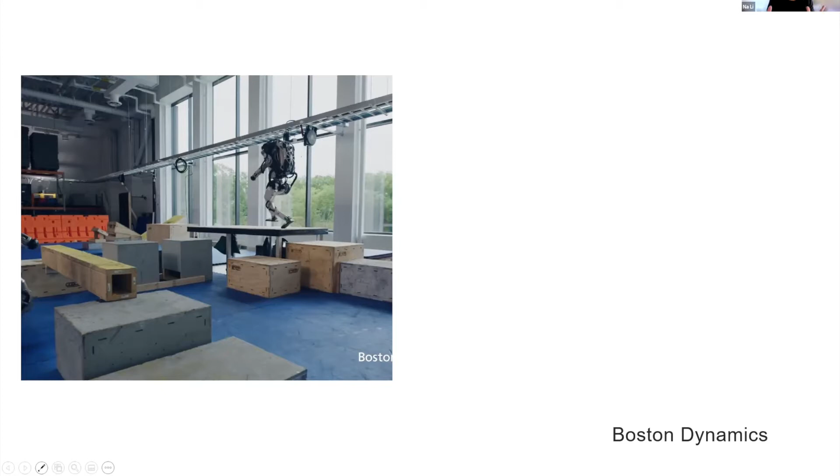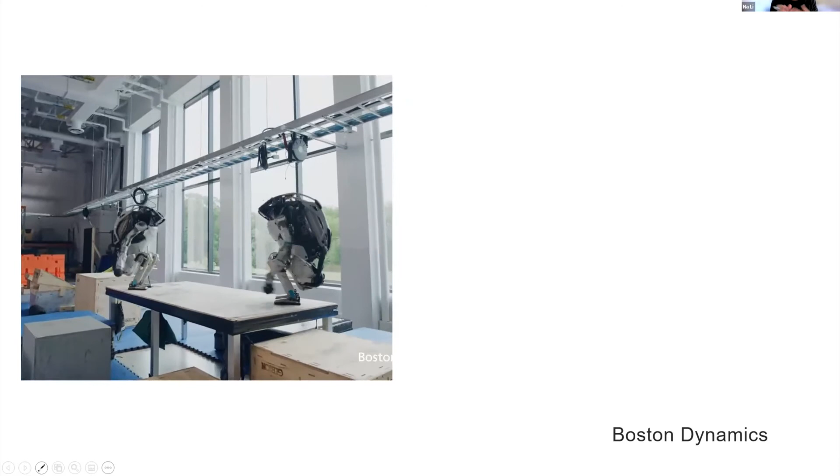Then we look at the progress. Indeed, there have been many exciting news. I think every year Boston Dynamics posts one cool video about how their robots have performed very difficult tasks. This is about Atlas, right? Every time I watch the video about Atlas, I imagine, how am I able to do this? I don't think even if people trained me hard, I'd be able to do any backflip.

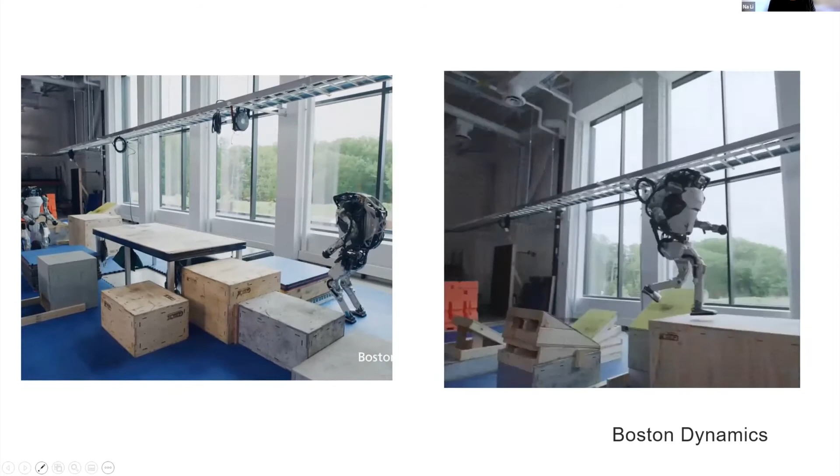But at the same time, if we just go ahead and Google it, we will also find the failure videos. So it's hard to imagine how many experiments they've been doing in order to collect enough data, or are they really using this kind of deep learning? At least right now, from the outsider's view, it's hard to know how they're really making this set of videos.

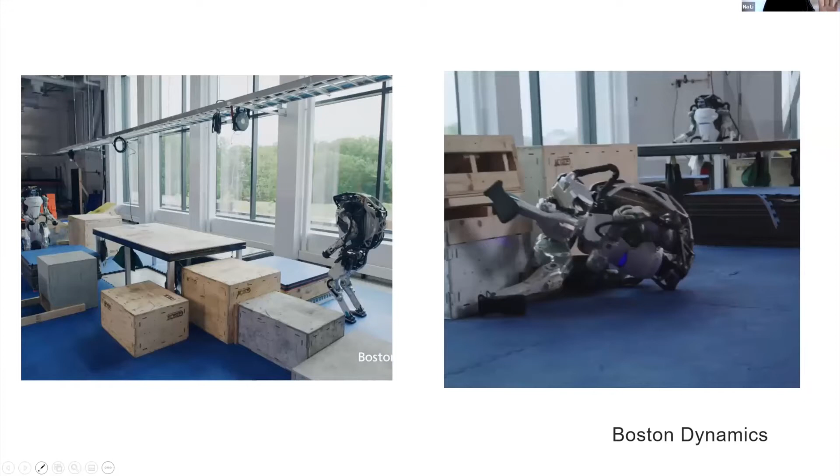So this is about the robotics that probably in the future. Now when we look at the societal system, that's actually closer to our daily life, the situation is actually even more cruel.

Even early last year, there was a big unexpected winter storm in Texas. To cope with the winter storm, ERCOT had to perform rolling blackouts. Millions of people's lives got affected, and there were 246 deaths reported related to this winter storm. So you can see, even with those kinds of smart devices, when there's a big urgency like a winter storm, we kind of go back to some old solutions.

Now speaking of autonomous driving, even though everyone is so excited about mixed autonomy, when we go watch those YouTube videos, it's devastating to see the tragedy of car crashes. So the message is that learning for physical, societal, dynamical systems is very challenging. It's different from just learning data from image data or from language data.

To address those challenges, there has been a growing need to integrate machine learning and dynamic control. I would say in the past years, the learning and control communities have been working together for a long time.

Now we look at the current trend. This is my biased viewpoint from a theoretical point of view. What's the difference between the two research areas? Speaking of learning, it's powerful in image recognition and language processing.

From the theory side, a lot of people, when they develop a learning method, the question they ask is: can I improve the query speed? Can I improve the sample complexity? If I'm doing online learning, can I make sure the regret is not big? And for image recognition, I really care about generalization, the statistical guarantee.

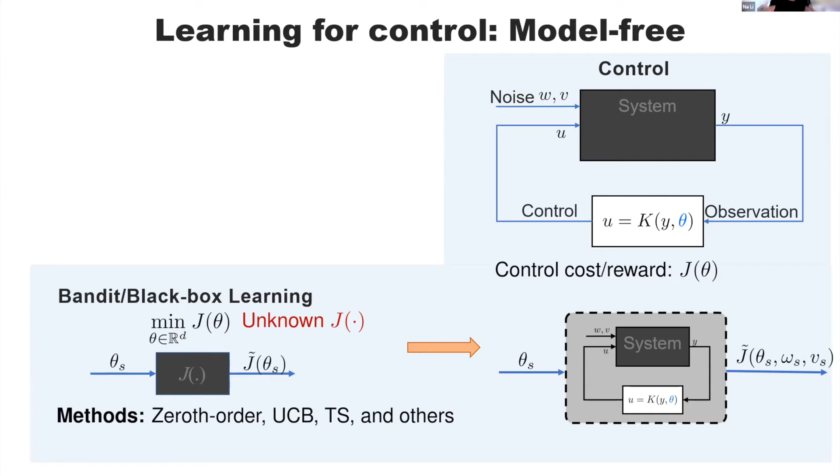I want to highlight this: there's lots of uncertainty and stochastics happening in the system. Every time I try to evaluate the performance of theta, it's always going to be affected by external disturbances or some noises. That's why I put in J tilde, not really J. It's impossible to have the true J using a limited number of data or channels.

So now the challenge for this one: this looks like I can go ahead to test the algorithm, but what is the performance, stability, probability, convergence? How many times do you really need to run those simulations? Another big challenge is it kind of totally throws away my prior knowledge. But what if I have some knowledge of my system? How do I incorporate this prior knowledge?

Those are the challenges of these problems. I'm not going to give you an answer for those, but I'm going to show you some progress we've been doing in our group. This is about learning for control.

Another thing I want to highlight: even though I say this is learning for control, from another perspective, you can also view those model-based and model-free control methods as control for learning. What do I mean by that?

If I really want to make my learning useful for the physical system, I have to deal with these dynamical system questions. In order to make the learning useful, I'm going to redesign the good learning-based control. You can also view learning for control as control for learning, like how to make learning be useful.

But there's another direct way of control for learning, so that's what I'm going to talk about today. Now let's come back to those learning methods.

There are different types of learning methods. For these two examples, like supervised learning, people using stochastic gradient descent, it's borrowed. And for the bandit or black box learning, again, there's a different type of method. But no matter what type of method, all the methods are iterative methods.

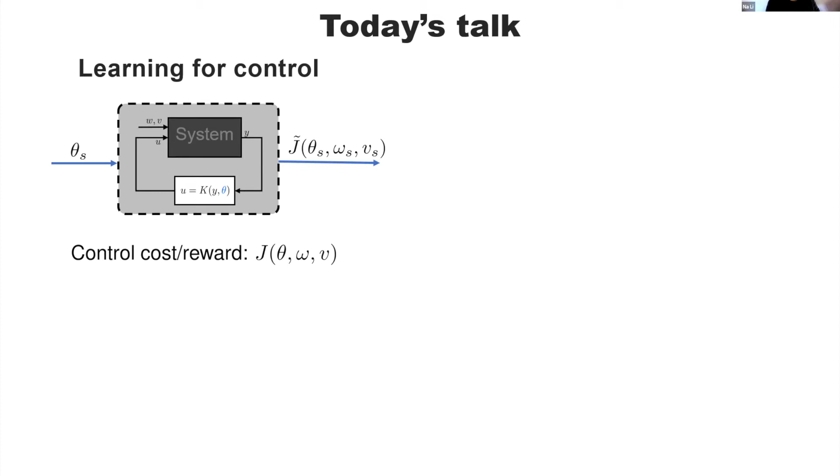So today's talk, I'm not going to answer all the questions I raised, but all the questions were meaningful questions to do a PhD thesis. And like the talk, I'm going to focus on two perspectives.

For the learning for control, I'm going to focus on the model-free part, where I'm not going to really model specifically about the system. So I treat it as a black box, taking the controller, looking at the outcome, and I want to see how this method is going to perform. Can I really guarantee certain stability, robustness, some question about this?

And on the other hand, come back to control for learning. If I really view this as a dynamical system, what is it that I can do? Can I help it? I can even show the limitation for the original method. So let me dive into the details.

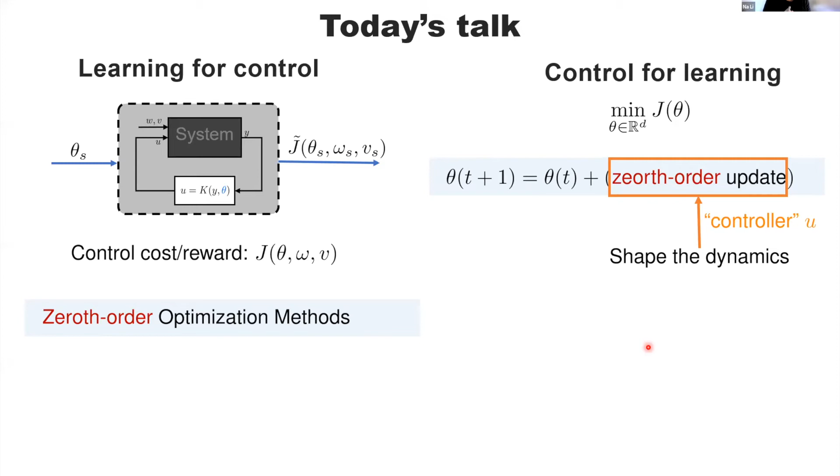Before the talk, the one common thing for these two parts is we're going to study the zeroth order method. So what really is the zeroth order method? For the zeroth order optimization, it's one of the black box optimization methods. Here we do not know J, but one assumption we're making is that J is differentiable, so the gradient is well defined, just there's no way to evaluate the gradient.

So we do the black box feedback, taking theta, getting the J theta feedback, for the gradient estimator. Zeroth order optimization roughly follows this line: taking theta and then doing the gradient estimator based on the value J.

You can imagine one easy way to do it is the finite difference approximation. The 2-point gradient estimator is kind of the finite difference approximation, just using less data points. At each time, rather than getting the direction along each of the D dimensions, you just take a random direction, do a small perturbation, and then do the finite difference approximation.

So look here, if the gap is R, over by R, this is kind of the gradient definition, once you make R go to 0. So this is a 2-point gradient estimator, which is actually quite powerful. When people compare the 2-point gradient estimator with the true gradient, the performance gap is quite small.

But for the rest of the talk, I'm going to focus on a different thing, the single-point gradient estimator. What's the reason behind it? What's a single-point gradient estimator? Rather than doing the finite difference approximation, it just uses 1 point of the value function, and this one can serve as a gradient estimation.

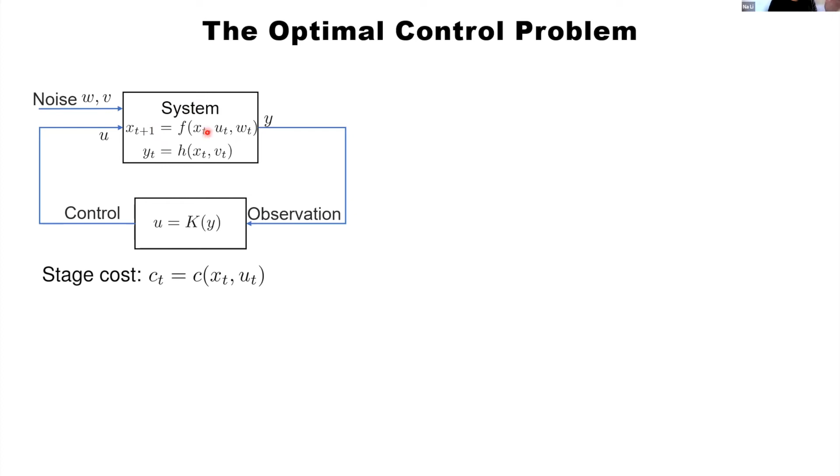As I mentioned, we can treat the control problem as a black box optimization problem. Let me put in a little more detail. We only focus on optimal control problems here, not other control problems. What does optimal control problem mean? I have a dynamical system, observation, state, controller. First, there's a stage cost well defined at each stage t, where t is the time associated with the time evolution of the system.

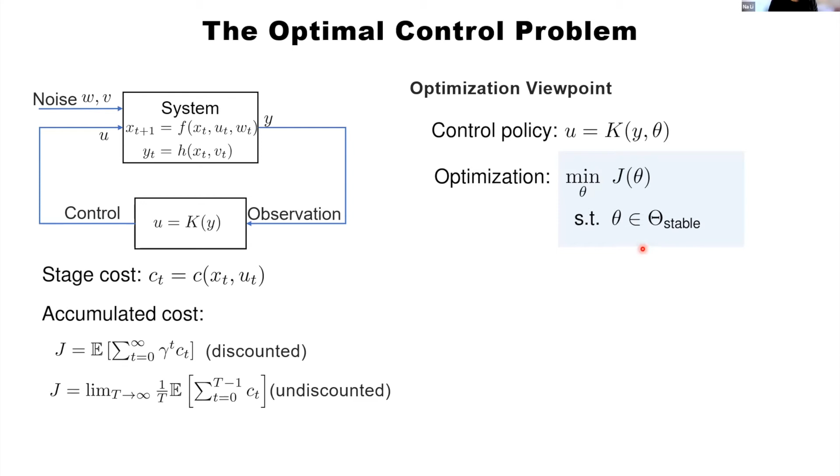Once we put in the controller, if I just care about stage cost, that's not really enough - I really care about the accumulated cost. You can do finite time horizon or infinite time horizon. We're going to focus on infinite time horizon. For the two cases of infinite time horizon, you can do discounted or undiscounted. Once we have this cost, we can view this as an optimization problem. I parameterize my policy by some parameter theta, and then treat this as an optimization problem. But one condition for this control problem is making sure my theta at least guarantees my system is stable before we talk about optimality.

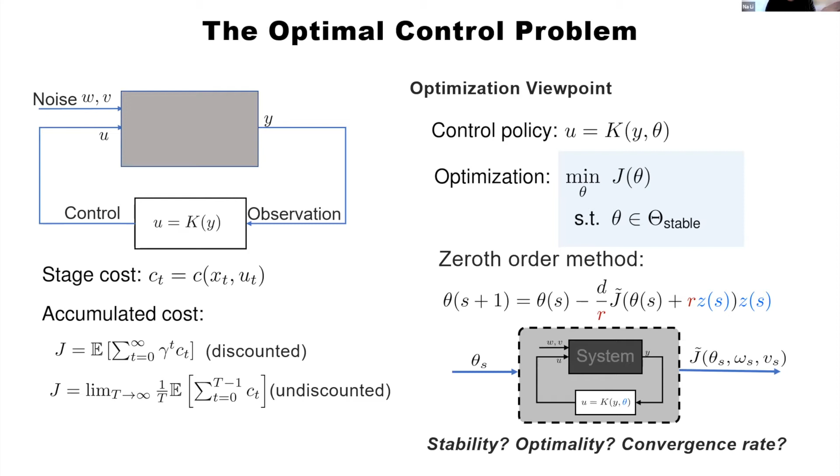So we're going to use the zeroth order method - taking theta, getting some realization, and taking the update to see how it works. This update is the single point zeroth order estimation. So this is the high level view. With this kind of view, there's a question - I'll talk about stability, optimality, and convergence rate. There's exciting positive news. I guess some of you already know this paper, it's from 2018 by Maryam Fazel's group.

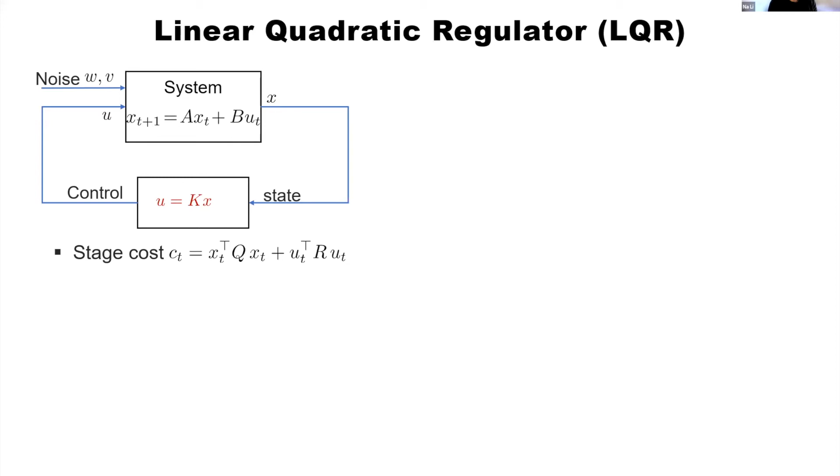So look at this problem - my first question is, can this method even work for the standard textbook question, which is LQR, linear quadratic regulator? In this problem, my dynamics is linear, and I have full observation of the state. I have a stage cost which is quadratic - that looks nice, because with this quadratic problem I know the optimal controller is a linear controller. So I just need the parameterization of K - I don't need a fancy deep neural net to parameterize the controller policy. And once I have that, if I have the model, I can even write down exactly what my J(K) is. So then I have a good understanding of the geometry of J(K), which helps me analyze the convergence of the learning method.

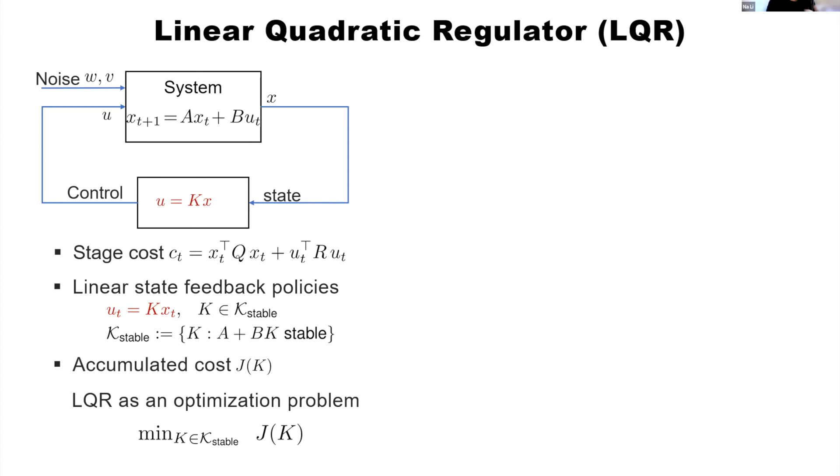So we treat this problem as an optimization problem. As I mentioned, once this 2018 paper came out, it generated a lot of excitement from both communities - hey, now it looks like the learning method can really help in the control design for this LQR problem. What do I mean? We can do the 2-point or single point estimator, and especially if I do single point under uncertainty.

So by choosing R carefully, and also eta - excuse me, there's a typo here - and also the step size carefully, we can guarantee with high probability that the learning process is going to be stable. Each K is going to stabilize the system, as long as I start with a good controller K which stabilizes the system. And then it's able to find the global optimal. So what's the reason this is even doable? As I mentioned, it's because this optimization method relates to the optimization landscape.

Even though the stable region is non-convex, it's connected. An additional nice property is the cost function JK here. Even though it's non-convex, it has this kind of nice property like gradient domination, which is an analogy of strongly convex in the non-convex domain. So I can guarantee there's a unique stationary point, and this stationary point is the optimal point. Because it's got this nice property, everything works.

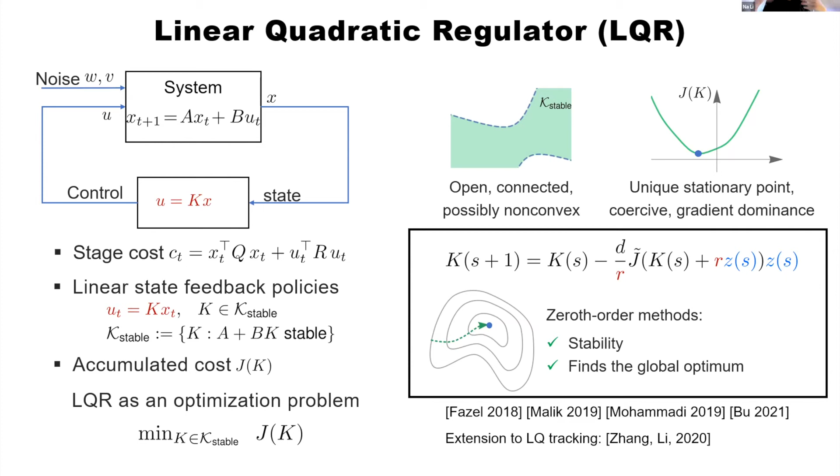Now let's dive into the problem I really want to talk about: decentralized LQR. This is motivated by the societal network systems I mentioned before. Assume I'm using a linear system to approximate the underlying physical dynamics, and I have sensors and actuators at different locations. You can call those agents or devices, and each one observes some information of the system, but no one is able to really observe the full information immediately. It's only a partial observation. Each controller takes in its own local controller to perturb the system.

But this is the local controller, so we focus on a control policy that reacts to the local information observed. Once I put in this domain, each agent has a cost, and everyone can observe how well the system is performing at their local location. If you think about thermal control in a complex building, for each room you roughly know how good the temperature is, how much power you're really consuming. This corresponds to those local costs, everyone observing how well the system is performing locally.

The objective is to find a good controller for every agent, for every device, to minimize the global cost, the cost I care about for the entire system. For transportation, I care about the congestion over the entire network. For building thermal control, I care about how well the temperature is across the entire building rather than just one room.

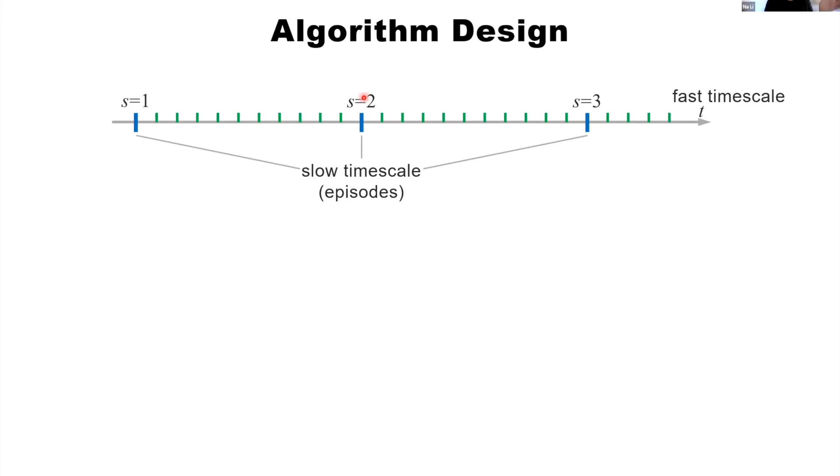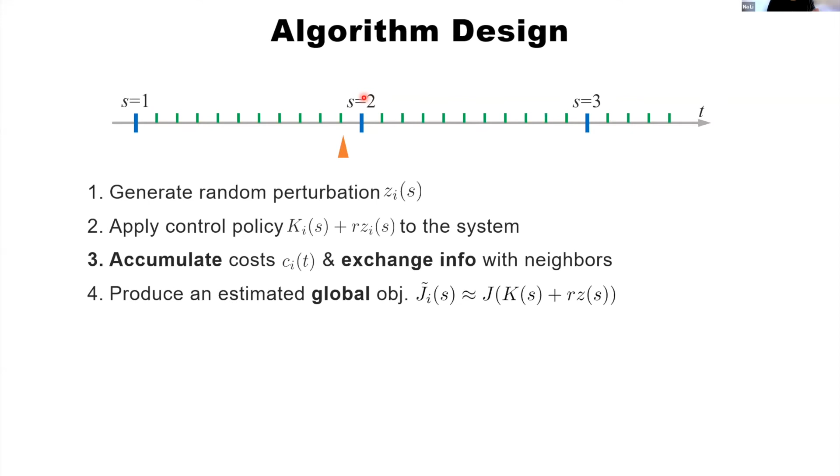Each slow step we call an episode 1, episode 2, and so on. So how does the algorithm perform? First, it's just an outline. We generate a random perturbation, I'll tell you how we generate that random perturbation later. Everyone applies the local control policy, they observe their own cost, and they share information.

By sharing the information, they get to estimate the global objective cost. Once they have some global estimation, everyone has their own local estimation of the global objective. They perform their zeroth order partial gradient estimator, and everything else just follows the zeroth order method, and then repeat the process. So let's dive in.

How exactly can they really estimate the global cost? The nice thing here is that the global cost is just the summation of everyone's cost. For this problem, the averaging or consensus method can do a very good job. Each time, every agent has their own estimation, their own observation that they share with their neighbors, and they add the new observation they're going to have. With a certain communication weight matrix being chosen, the process is able to find the true global cost function.

So what's the performance guarantee? For all these kinds of consensus papers, you can grab any one of them to see what the performance guarantee can be. It also shows, if we really run the system for T_J, how accurate it is.

I want to highlight one thing. This is a little bit roughly different from the distributed optimization side, in my opinion. Even without a decentralized method, in the centralized method I mentioned, I need to run my simulator, put in my controller, wait, and then update. So for my system, even for a single agent, I need to wait anyway. For this problem, my multi-agent setup didn't really complicate my process much.

You are waiting to understand your limit average cost. At the same time, you also exchange information. So we do not need to add another loop. All this sharing of information and estimating the global accumulated cost happens at the same time, which is pretty nice. That's why we didn't push in, hey, if I really do the consensus optimization, I will put in communication later on. This is a natural way, I don't need to do that. It's just using the same inner loop process to also put in my estimation of the global cost.

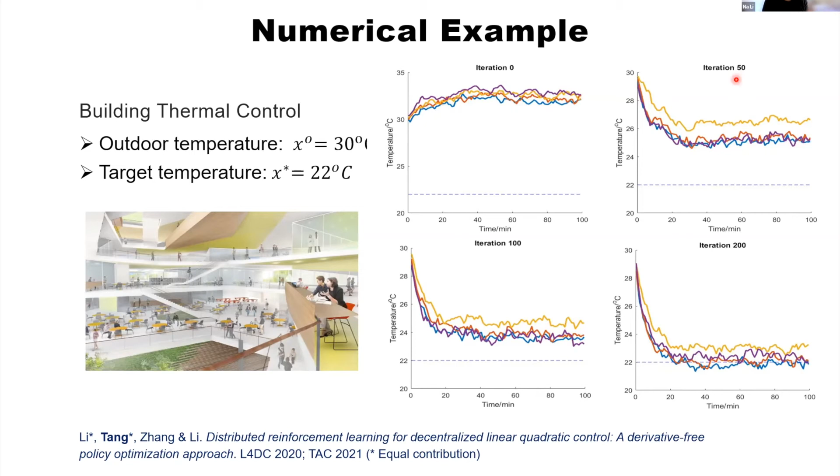And if you look at the simulation here, roughly by 100 iterations the controller is already making the system go in the right direction. The iteration corresponds to the episode we talked about before. It's actually faster than what our theory expected, but that's typically the case - the theoretical guarantee is always more conservative.

But now let me come back to a more critical issue. So for stability, yeah, we have a high probability guarantee - there's no additional definition of stability needed. But the optimality guarantee - this is kind of cheating here - when we say optimality guarantee, the truth is we only have the stationarity guarantee.

It's like, with how many samples will my gradient get small. So the question is, does this stationary point really correspond to the optimal point? No, right? This is a weak optimality guarantee. So why do we only have this one?

That's something I want to talk about now - the importance of the geometry of this control problem. So let's come back and compare with the successful story we had before for the centralized LQR. For the centralized LQR, we observe all the information X, and we know this is the optimal controller.

And the decentralized LQR, this is not really the optimal controller if we open up all the choice of classes of the controller. So we stick to this parameterization. It's Ki times my local observation. So I stick with that because my information is limited.

And what's the reason of it? Now we look at the region. So for this region, even non-convex, but it's connected. It's just one connected component. So if I start with some point, at least I have a hope to converge to the optimal point.

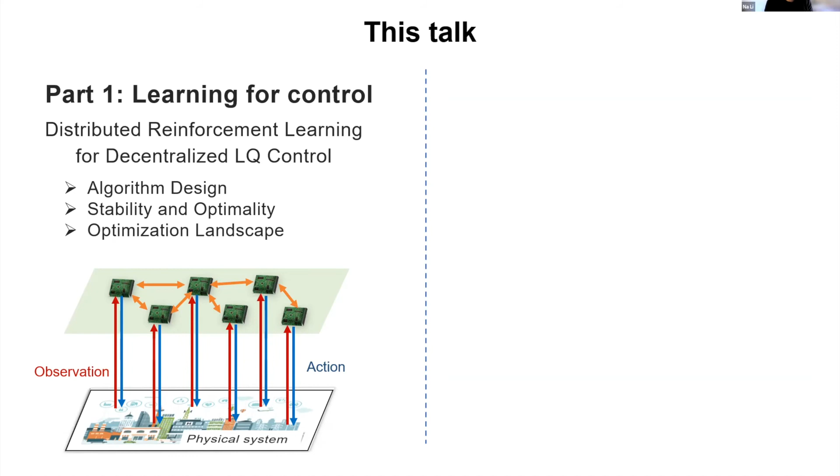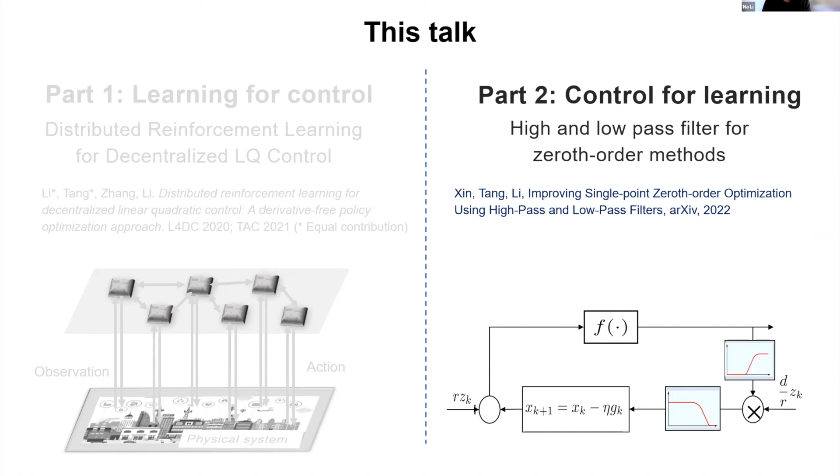Then I will continue to talk about the second part, control for learning, which is a little bit different flavor compared to this work. But the motivation again comes back to wanting to improve our methods so we can do better control. So let's come back to this performance guarantee.

I mentioned one thing here - the sample complexity we put in. And we were trying to ask a question: if we do sample-based methods through zeroth order optimization, is this the optimal thing we can do? Can we remove that complexity, not really 1 over epsilon to the 4th, and do something better? So that's something we ask ourselves - can we do better sample complexity?

I think a lot of you will have the question: hey, you're just doing the zeroth order method I was showing, which is just vanilla gradient descent. How about doing the accelerated gradient descent? So yes, we're going to accelerate the zeroth order optimization, but I'm not going to talk about Nesterov. I'll have one slide for Nesterov to say the problem with using Nesterov for this type of problem. So we're going to accelerate zeroth order optimization, but how are we going to do it?

We're actually going to come back to the traditional control and electrical engineering perspective. Let me take a detour to tell you a similar story. Zeroth order optimization - I think a lot of discrete time, learning and optimization people have been working on it. But in the control field, we have something similar, almost exactly the same, which took me a while to eventually recognize - it's called extremum seeking control.

This is called extremum seeking control, similar to the zeroth order method. It's quite powerful and very similar. Rather than thinking about discrete time, this is a continuous time dynamics.

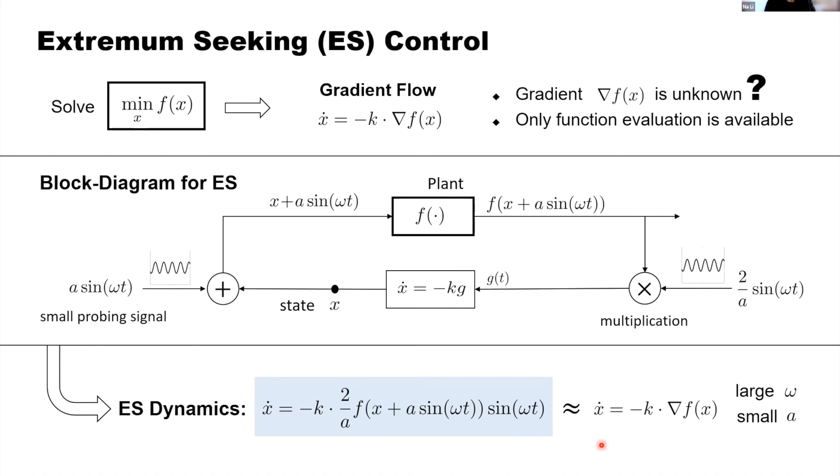For this one, how people analyze it is to do the averaging. Roughly this method will approximate the gradient flow in continuous time.

To show a little more intuition or visualization of what exactly the method has been doing - the frequency, typically you put in a very large frequency to perturb, and your amplitude A is going to be small, since you don't want to corrupt your original signal. So this is the trajectory of X you will see. It has a time scale separation.

For the fast time scale, this is the fast variation due to those perturbations. And then this is the slow variation that actually describes overall how X is evolving, which is the gradient flow, the true gradient flow.

How people analyze it - we make an assumption that the function is differentiable. Here I'm using the Taylor expansion to explain it. From the Taylor expansion, that's how it looks: f(x) plus this perturbation term.

From the control and dynamical systems area, how people analyze it is to do averaging. I average the dynamics over a time period, especially if you put it into the period of the sinusoidal signal, then this part will kind of cancel once you do the integration. You only get one term for this part, and this is a small error term.

From extremum seeking control, it looks similar to the zeroth order method - the method, the analysis method is definitely different. But let me compare why I say it looks identical to me. The only difference - now you can compare together. Continuous time versus discrete time - not really a big difference in this one.

Now the perturbation - this is a deterministic signal, sinusoid, versus this is a random signal. And magnitude - I still need to control how much I'm going to perturb. The R and the control gain is like how aggressive my controller, my system dynamics, react to the signal. And the step size - you can find all those analogies, a one-by-one correspondence between the two methods.

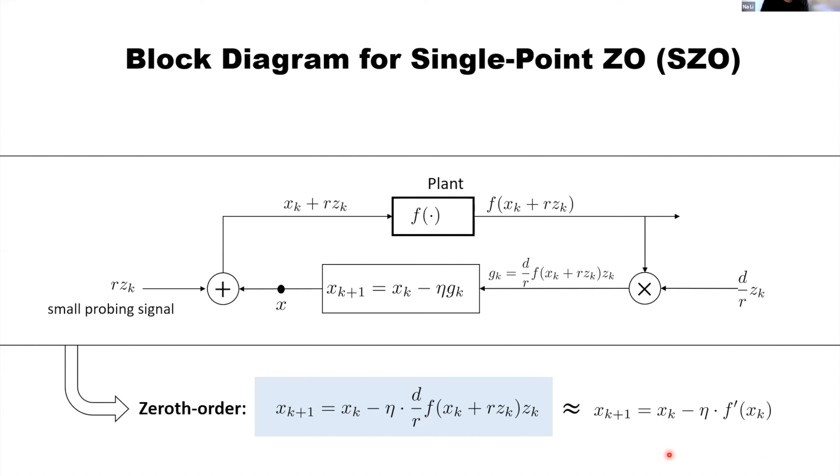Now come back to extremum seeking control. When we look at the extremum seeking control textbook, we found that because people actually use extremum seeking control in practical physical systems, people observed, okay, something we don't like, we want to improve it. So how do people improve it? Here, I'm going to show people actually add filters into it.

So what is the filter? Here we had a high pass filter and a low pass filter. For the low pass filter, when I first saw it, I thought it makes sense, right? With too many noise and fluctuation going on, I want to add in some low pass filter to get in the true gradient information. That's kind of my hello intuition. But then, like, the high pass filter—there's already too much noise, too much fluctuation. Why would you actually need the high pass filter here?

So now, why do people need it? For the high pass filter, it's actually going to wash out some DC component, which is not useful for my gradient estimation. I'll show you even more math later on to tell you why the high pass filter is actually a very good thing here.

And the low pass filter indeed washes out some high frequencies to get a better gradient estimation. In the control textbook, distributed control textbook, you can find that the high pass filter and low pass filter improve the transient behavior. So you'll have less oscillation, much smoother transient behavior before you really converge to that optimal point. And you can imagine, I bring the block diagram.

Now since I have the block diagram, before that, let me give a little more intuition about how these filters work in extremum seeking control. As I mentioned, one tricky thing is why the high pass filter works. At this part, the signal is F(x plus a sine omega t). You do the Taylor expansion, so now I can actually see what the two components are. Fx is a slow frequency, almost like the DC component, and this has a frequency.

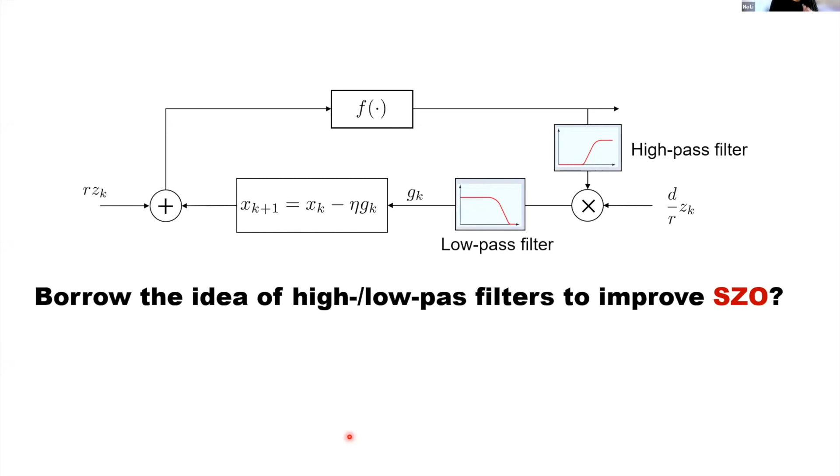So now putting this into discrete time, like our single point zeroth order method, what are we going to have? First I'll tell you the result: we put them in, and it worked. And actually there's a different, intuitive explanation for what exactly the high pass filter and low pass filter are doing.

For the high pass filter, what it's doing is actually introducing a residual feedback, rather than just using—it's still a single point. Each time you do one perturbation, you get your current estimation of the F cost function, and this is from the previous time, right? It's still a single point, but I'm not really throwing away my original point. So if the function is smooth, the natural implication for the high pass filter is actually to use some residual feedback from the previous time. That's the high pass filter part.

And the low pass filter is actually corresponding to the momentum method.

But this is different from Nesterov, as I will show you later. The Nesterov method, if you don't really do carefully with the momentum, it will cause trouble. The low pass filter will introduce momentum to this dynamics through a certain way, and together that helps the dynamics. I can give you some flavor of how we really get it.

It's pretty straightforward. High pass filter, continuous time, we just do the discretization. When we do the discretization, we find that it naturally introduces the residual feedback. This is a high pass filter. As I mentioned, the residual feedback is, a paper happened in 2020 where they found through another way to add the residual feedback, and they realized it can help the single point zero order method.

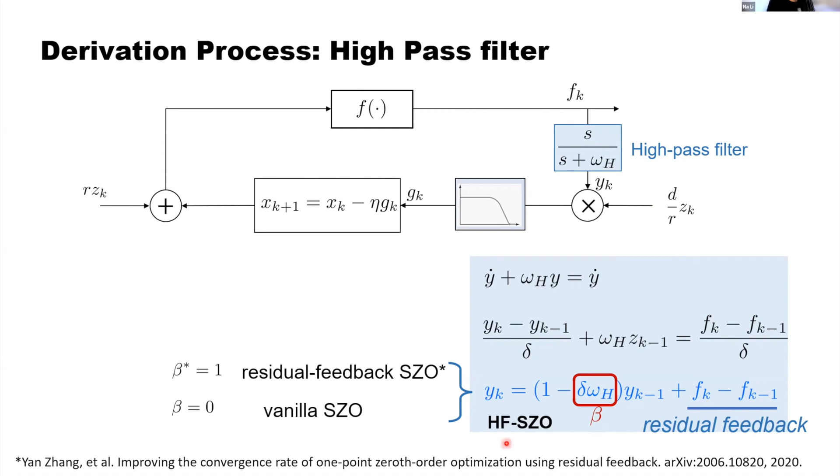And this actually, we have an even broader class of methods. You can really talk about how strong you want this kind of filter, and you can shape your dynamics. So this is the high pass filter part.

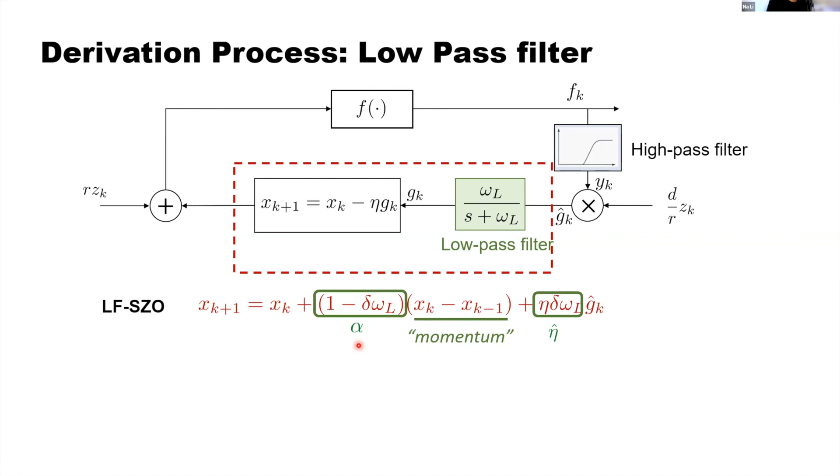And the low pass filter, similarly, do the discretization, put in that information, and roughly look at the discrete time, how it looks like. So rather than just putting the two block diagrams, we can put them together, and that gives us more intuition about what exactly the low pass filter has been doing. It's actually adding this momentum term. And again, it also tells us, once we change the hyperparameter, what that hyperparameter corresponds to.

So putting it together, I put it into the block diagram, which helped me find the analogy and know which part I can change and improve. We came up with a new single point zero order method. The two components, the high pass filter, roughly can explain the sense that it reduces the variance, and the momentum does some acceleration for this method, different from the Nesterov acceleration.

I would like to clarify one thing about the 2 point: if I just do the optimization problem, I have the function f available. The 2 point estimator is definitely better than single point because you have finite difference approximation. It has a much smaller variance, much smaller values. So the 2 point is kind of our benchmark we want to compare against.

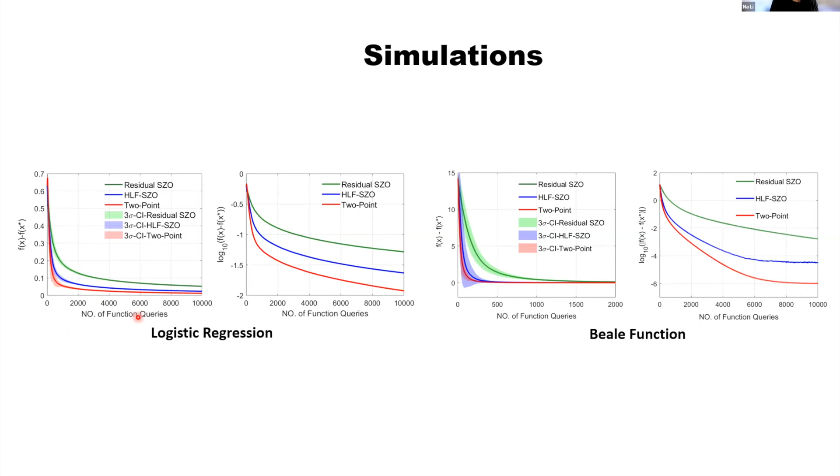So you can look at the simulation result - indeed, our high-low pass filter almost achieves similar performance to the 2 point, but there's still a gap because the 2 point has additional sample information.

In summary, for this second part, I've shown you how traditional electrical engineering tools like block diagrams can help us rethink these learning methods. Another way you can go ahead and play with this - rather than first order high pass filter and first order low pass filter, you could even go ahead with more complicated filters, which would probably generate different kinds of dynamics. Which one is better, which one is worse - that will be an interesting research direction in the future.

So as I promised, I will show you something - the negative result of Nesterov methods. This is the continuous time version of the Nesterov method. We studied this dynamics and realized this method is not robust. For this Nesterov method, even with a very simple strongly convex function, if we just add noise into the gradient estimation, it becomes unstable.

So the way we actually make the method robust is critical, because as I mentioned, there's no way - for all the problems we've been doing, the gradient is never going to be accurate. Whether you do single point estimation or stochastic gradient estimation, this is never going to be accurate. It also has additional error, but the Nesterov method will blow up the entire learning process. So we can robustify these methods through different tools. The tool we used is hybrid regularization - after a while, we regularize this additional term.

So we can also do some restarting, which is kind of similar. The learning community also realized if you restart the T, it probably can improve the system dynamics. And for us, we actually can put them into the formal hybrid system to study the phenomenon, to really control it and look at the dynamics much cleaner.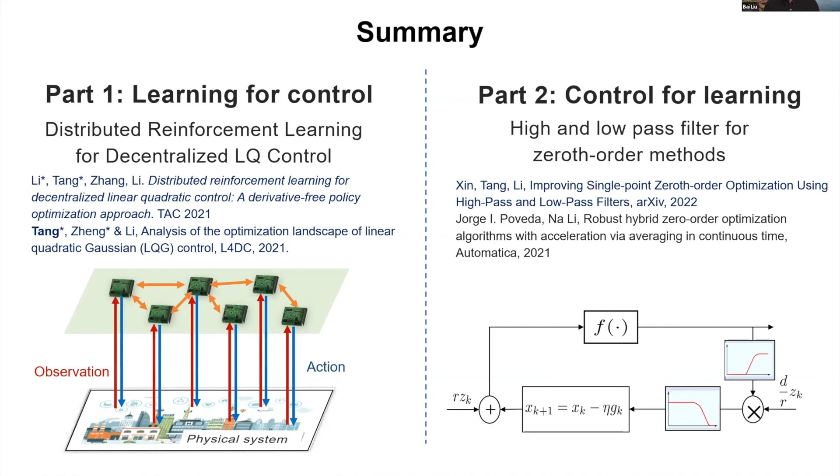I don't have a specific answer for that, but I can tell you what we tried. We only studied the first order filter. For the first order filter, for the residual feedback, we did some study for the beta choice. It turns out beta equal 1 actually gives us the best numerical result, but the theoretical result cannot really show that. The theory we have here is kind of limited by the technical tools we have. Once you go to a more complex domain, my answer would be: it depends on the problem, depending on the structure of F. Whether a higher order filter will help or not depends on what kind of F we are really dealing with.